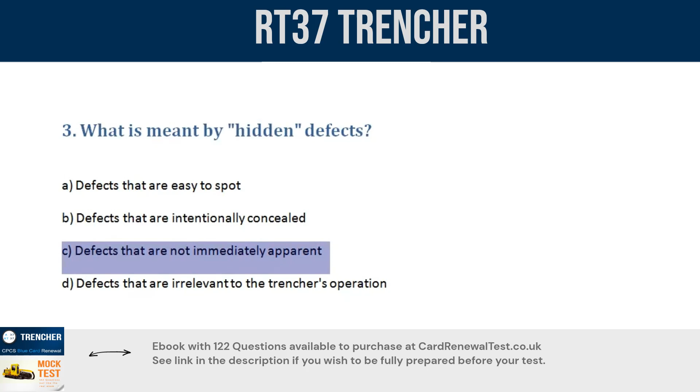4. What could potentially occur if the trencher operator fails to consider the risk of trench collapse? A. Trench collapse in certain soils. B. Enhanced trencher efficiency. C. Increased operator comfort. D. Improved fuel consumption. Correct answer, A. Trench collapse in certain soils.

5. What must be done before driving on slopes? A. Rely on the operator's judgment. B. Consult bystanders in the vicinity. C. Drive as fast as possible to save time. D. Check and follow manufacturer's criteria. Correct answer, D. Check and follow manufacturer's criteria.

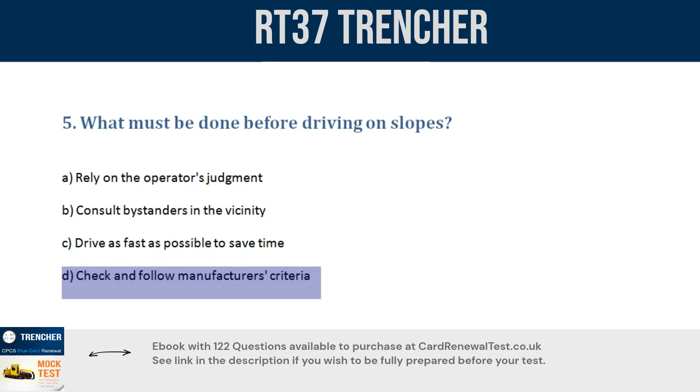6. What are the dangers of operating or traveling a trencher on or across steep slopes? A. Increased trencher speed. B. Risk of overturn and instability. C. Enhanced operator comfort. D. Improved fuel efficiency. Correct answer, B. Risk of overturn and instability.

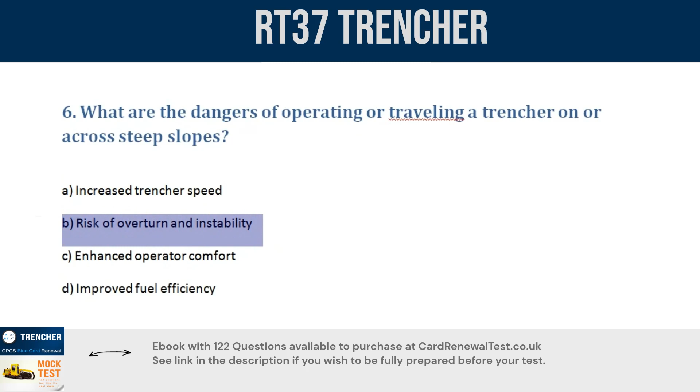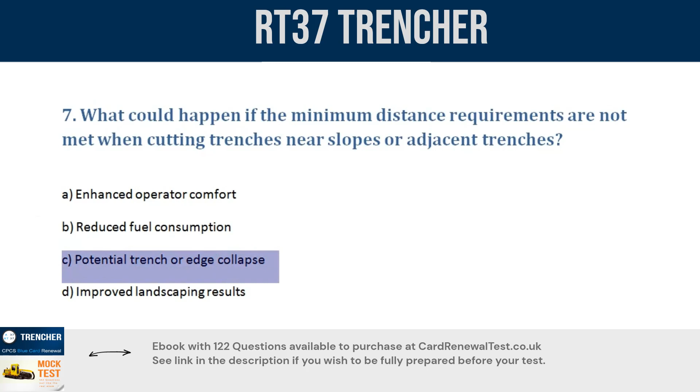7. What could happen if the minimum distance requirements are not met when cutting trenches near slopes or adjacent trenches? A. Enhanced operator comfort. B. Reduced fuel consumption. C. A potential trench or edge collapse. D. Improved landscaping results. Correct answer, C. Potential trench or edge collapse.

8. How can manually cleaning spoil from around the cutting area be hazardous? A. It may result in injuries from contact with rotating parts. B. It minimizes operator workload. C. It improves operator experience. D. It enhances trencher speed. Correct answer, A. It may result in injuries from contact with rotating parts.

9. What issues are associated with using excessively worn teeth on a trencher? A. Improved trencher efficiency. B. Operator job satisfaction. C. Reduced trencher maintenance costs. D. Inefficiency and additional strain on the trencher. Correct answer, D. Inefficiency and additional strain on the trencher.

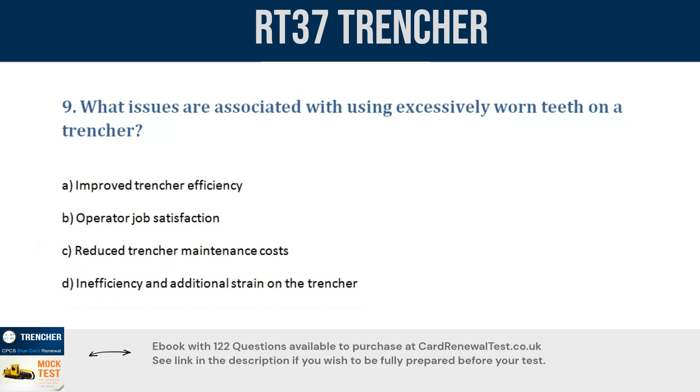10. What type of adjustment might need to be made on cutting chain types? A. Engine power enhancement. B. Operator seat positioning. C. Chain tension adjustment. D. Tire pressure calibration. Correct answer, C. Chain tension adjustment.

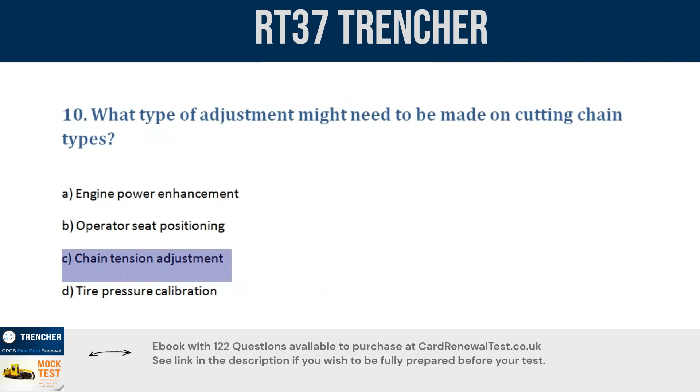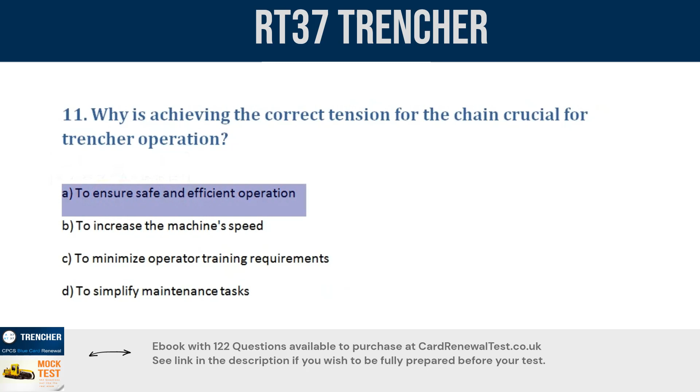11. Why is achieving the correct tension for the chain crucial for trencher operation? A. To ensure safe and efficient operation. B. To increase the machine speed. C. To minimize operator training requirements. D. To simplify maintenance tasks. Correct answer, A. To ensure safe and efficient operation.

12. What condition must be met for a ROPS frame or cab to minimize injuries during an overturn? A. The trencher must be operating at full speed. B. The operator must be experienced. C. The seat belt must be worn by the operator. D. The trencher must have a high-quality paint job. Correct answer, C. The seat belt must be worn by the operator.

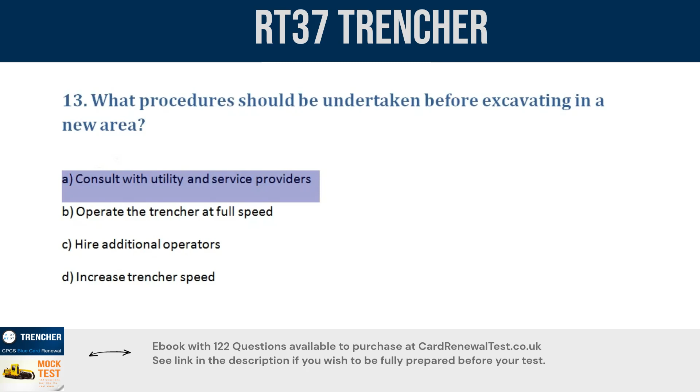13. What procedures should be undertaken before excavating in a new area? A. Consult with utility and service providers. B. Operate the trencher at full speed. C. Hire additional operators. D. Increase trencher speed. Correct answer, A. Consult with utility and service providers.

14. How may underground contact with solid objects be noticed by the operator? A. By observing a decrease in trencher speed. B. By hearing unusual noises from the trencher. C. By experiencing increased operator comfort. D. By noticing improved fuel efficiency. Correct answer, B. By hearing unusual noises from the trencher.

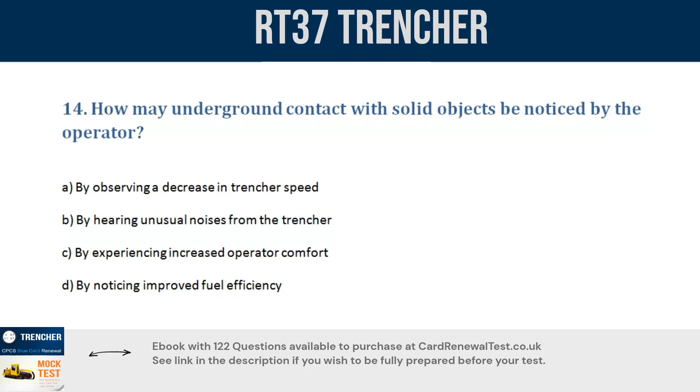15. What are the dangers when the cutting chain has caught underground cabling? A. Enhanced operator comfort. B. Improved trencher performance. C. Reduced trencher maintenance costs. D. Risk of potential injuries to those in the immediate area. Correct answer, D. Risk of potential injuries to those in the immediate area.

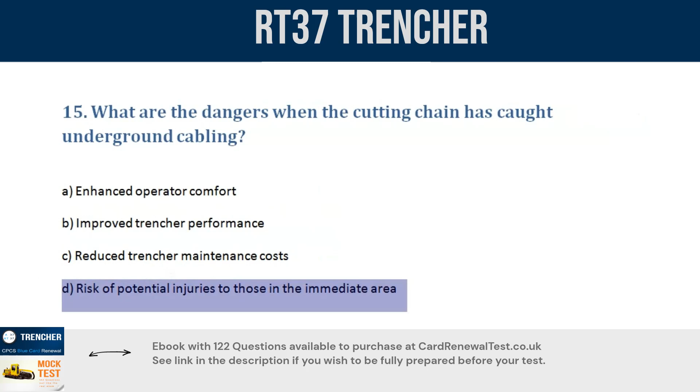So this was the last question of this free mock test. If you made it this far, I guess you're about to take the dreaded CPCS renewal test, and there are no other study materials except the long and boring fact sheet. Some people have failed this multiple times, like my brother, who is not the brightest tool in the shed. But I still love him, enough in fact to create a whole bunch of multiple choice questions from his category fact sheet. And guess what? He finally passed.